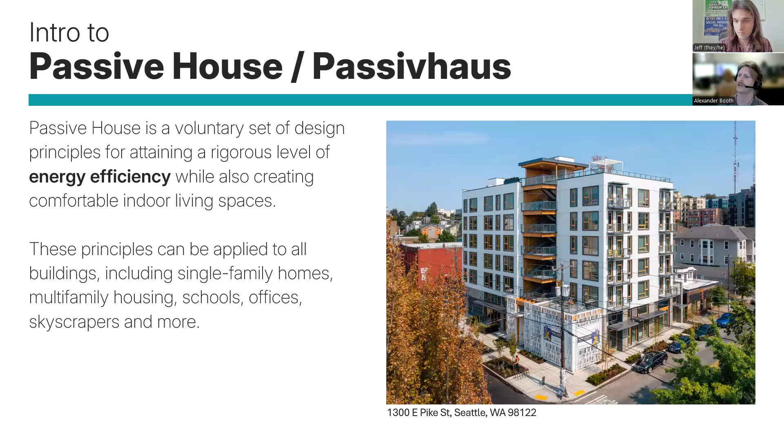The journey to modern passive house standards has roots that stretch back several decades, grounded in pioneering research and practical application, particularly in response to the oil crises of the 1970s. Today we face another US-made energy crisis, which I'll touch on later. A significant and often cited precursor to Passive House is the Saskatchewan Conservation House built in Canada in 1977. The groundbreaking project was an early, ambitious attempt to create an ultra-low energy home, pushing the boundaries of insulation thickness, airtightness, and passive solar design to radically reduce energy use in heating and cooling.

It demonstrated the immense potential for dramatically reducing reliance on active heating systems, such as furnaces, and served as a powerful proof of concept for the high-performance building movement. If a home in a frigid climate could consume ultra-low amounts of energy, then the same could be said of any home anywhere in the world.

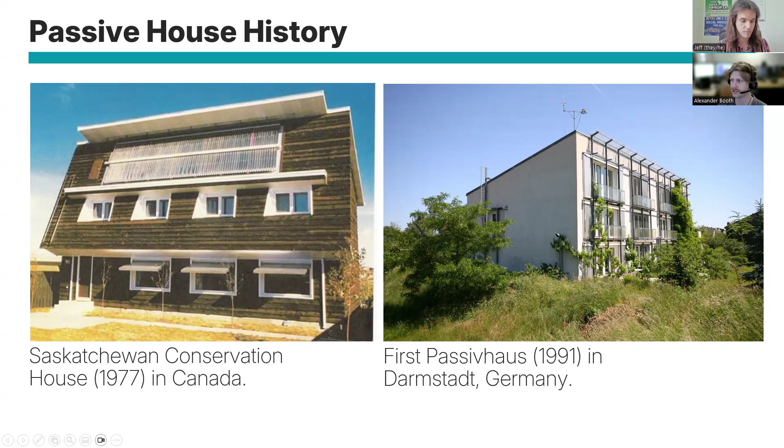The official birth and formalization of the Passive House standard as we know it today occurred in Darmstadt, Germany in 1991. This project, which became the world's first passive house, was a result of a visionary collaboration between Dr. Wolfgang Feist, a physicist, and a Swedish professor, Bo Adamson, of building science. They meticulously established the core technical criteria, focusing on energy, airtightness, and thermal performance that define passive house. It was not a one-off project. It was carefully monitored for decades, proving the efficiency and durability of the standard. Since then, it has been replicated and refined globally, demonstrating these principles are not just theoretical, but highly achievable and practical in real-world construction across diverse climates.

To truly understand Passive House, it's essential to recognize that there's no single magic bullet or isolated technology that achieves the standard. Instead, it's a highly integrated, holistic design strategy built upon excelling in four fundamental control areas that define a building's performance. These pillars don't operate in isolation, they work together to create a superior building envelope and indoor environment.

The building envelope is essentially whatever component faces the exterior, so the roof, outside walls, and the bottom floor that touches the ground, controlling heat flow to prevent unwanted heat loss in winter and unwanted heat gain in the summer. Air control, seen here, addresses tiny air leakages, which are major sources of energy loss. Radiation control focuses on managing solar energy and harnessing daylight, and moisture control is critical for preventing water damage, mitigating mold growth, and ensuring healthy indoor humidity levels.

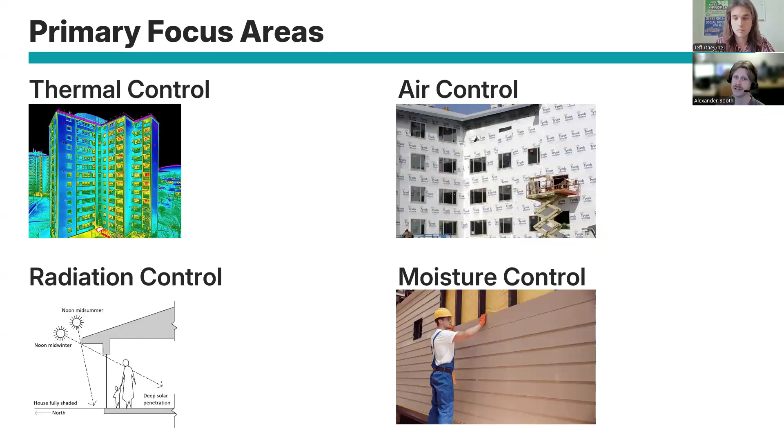Exploring the challenges they face and the innovative detailed solutions Passive House uses to overcome them. The first pillar, thermal control, is fundamentally about maintaining stable conditions regardless of weather extremes, be it a winter, scorching summer, or anything in between. The goal is to minimize energy required to achieve this.

Left illustrates a pervasive and critical flaw in conventional construction, which is the thermal bridging in these 2x6 studs. They act as bridges or direct thermal highways, allowing heat to bypass the insulation and easily escape the building in winter. One way to think about it: a solid object is denser than air, so like the wood, it has more atoms per inch cubed. I like to imagine that each atom carries a bunch of heat with it, and if you have more atoms with more heat, it's able to push that heat through. That's why the studs here, and the concrete columns and concrete slabs on this concrete tower, do the same thing.

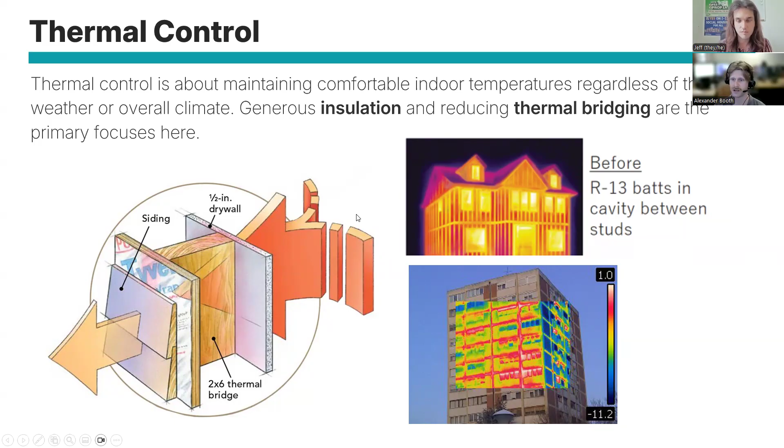So that acts as the bridge. It significantly undermines the overall effectiveness of cavity insulation, creating uncomfortable cold spots on the interior, increasing the risk of condensation, and leading to a lot of energy waste. The thermal image of this home also illustrates that issue. The bright yellow and orange spots indicate areas of substantial heat loss from the interior, usually around the structural elements, as well as the concrete tower, meaning the structural system is not isolated from the exterior. The uncontrolled heat movement is just a massive heat loss, and that's something Passive House aims to eliminate.

So here, their solution is continuous insulation. It dramatically improves thermal performance by implementing this 1-inch rigid exterior foam along the outside. As shown in the diagram, instead of relying on insulation between the structural members, it's applied over the structural members and continuously over the roof. This effectively wraps the entire building in a thermally unbroken blanket, ensuring no part of the structural frame directly connects the interior to the exterior. This critical continuous layer eliminates the thermal bridges that plague conventional construction, creating a much more consistent and effective thermal envelope.

The result of this extra layer of design is evident in this after thermal image. You can observe a far more uniform and darker color across the building's exterior, indicating minimal heat loss and a consistent surface temperature. You can see a clear example of this home in the bottom right with very efficient walls, which are all blue. The windows are about as efficient as the home on the left, but the walls are much better. This signifies that the building's thermal performance is optimized, translating directly into vastly improved indoor comfort and the virtual elimination of cold spots and drafts. This fundamental shift from insulating between the structural elements to insulating over them is a cornerstone of Passive House performance, contributing to a more durable, quiet, and thermally stable indoor temperature.

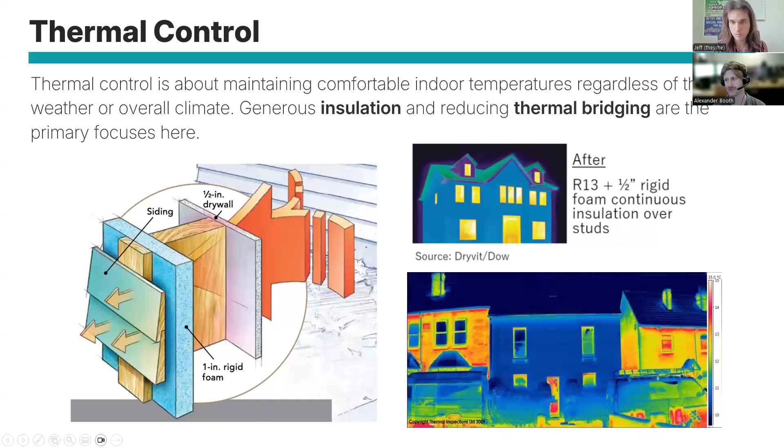To achieve such robust thermal control, Passive House designers have a diverse and sophisticated palette of insulation solutions. Here it highlights all of these common types, such as spray foam, fiberglass, cellulose, mineral wool, reflective, rigid foam board, loose fill, and batt insulation. I've highlighted cellulose, mineral wool, and loose fill as our favorites simply because they have less embodied carbon, if you are familiar with what that is.

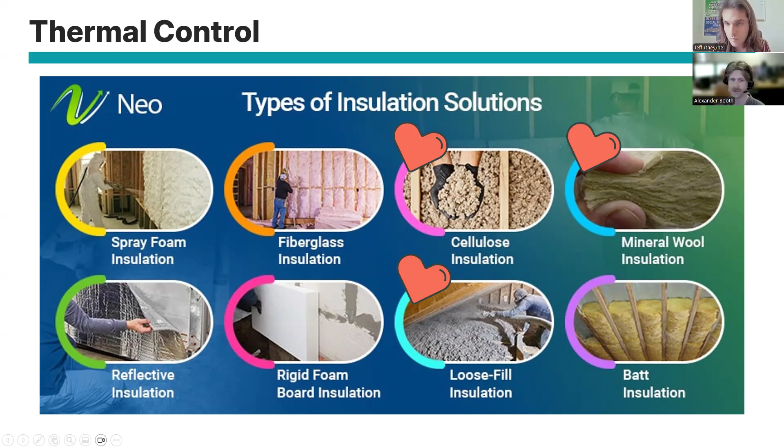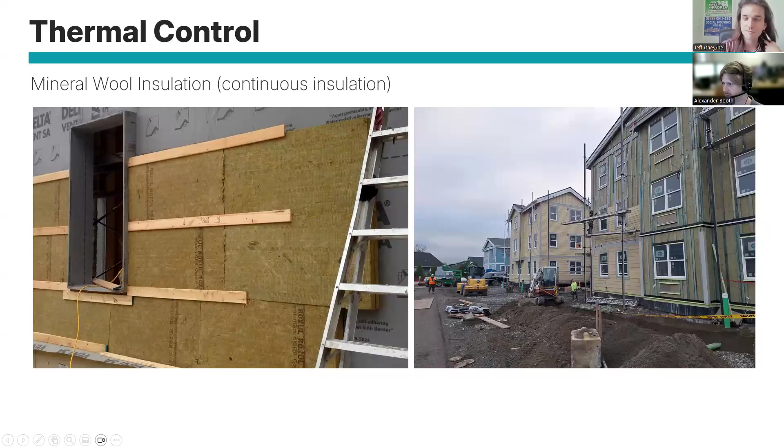One particularly effective and increasingly popular solution for exterior continuous insulation is mineral wool insulation, which is what it sounds like—a bunch of minerals extruded into a wool-like material. As you can see in the insulation image on the left, it's typically applied as dense, semi-rigid boards directly over the building's sheathing. Mineral wool offers excellent thermal performance, is naturally non-combustible, moisture resistant, and provides good acoustic dampening. This continuous application is paramount to eliminating thermal bridges and ensuring the entire building performs as a truly integrated thermal envelope. The image on the right shows one of my projects, also installing 1 inch thick mineral wool, which you see underneath this siding here. And this mineral wool on the left is about 2.5 to maybe 3.5 inches thick, which is pretty thick mineral wool.

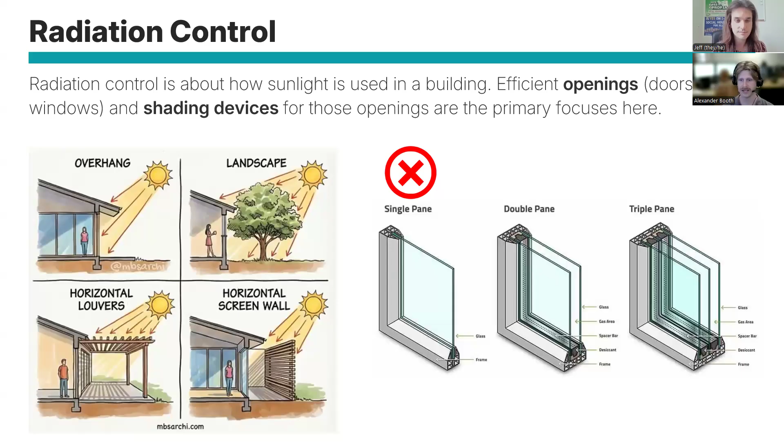Passive house standards mandate exceptionally high performance windows, sometimes requiring triple pane, which feature multiple layers of low emissivity glass, which is like a special film on the glass. It also includes gas fills like argon and krypton that carry even less heat than typical air. These advanced windows dramatically reduce heat loss in winter and unwanted heat gain in summer, while also improving acoustic performance.

Passive House takes a fundamental and intentional approach to building orientation from the very outset of the design process. Hey Alex, really quick, you said it improves acoustic performance, what do you mean? Good question. Acoustics would be the sound. A lot of windows don't really do a good job of blocking sound, but thankfully, the more insulative a window is, the more it also blocks noise.

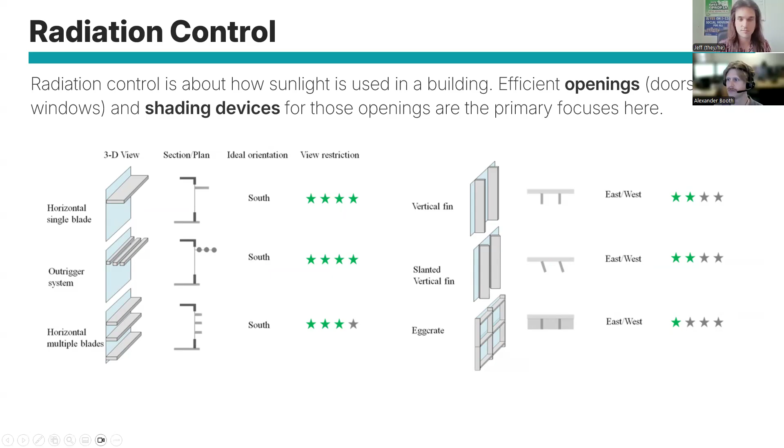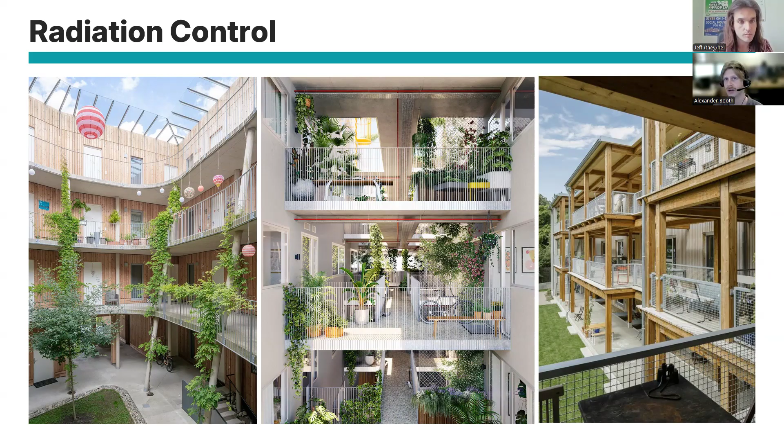Air control, the third critical pillar and arguably one of the most defining characteristics of Passive House, is the control of the air. These technical mandates make buildings exceptionally airtight to prevent uncontrolled air leaks.

It's crucial because uncontrolled air movement through any gap, crack, or penetration is a major culprit in energy waste. It leads to uncomfortable drafts, allows outside pollutants such as dust, pollen, and volatile chemicals like air pollution to enter, and enables moisture to infiltrate and condense within wall cavities, causing potential damage and mold, significantly compromising the effectiveness of the insulation we talked about. By painstakingly sealing the building, Passive House eliminates these problems, ensuring consistent indoor air quality and temperature, and drastically reducing heating and cooling loads.

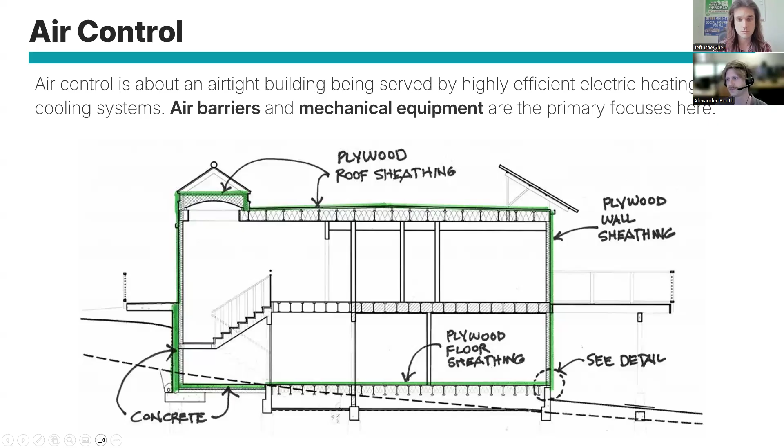This focus on air tightness is quantitatively measured by a blower door test, which puts a giant blower fan on the front door of a unit and blows air in at a certain pressure, measuring what's called the air changes per hour.

To put this into perspective, Washington State allows 4 air changes per hour for residential units. Most other U.S. states are typically in the range of 3 to 5. Florida just downgraded their standard from 3 to 7 air changes per hour. The Passive House standard, though, is a mere 0.6 air changes per hour, which is more than 6 times more airtight than the minimum required in our state.

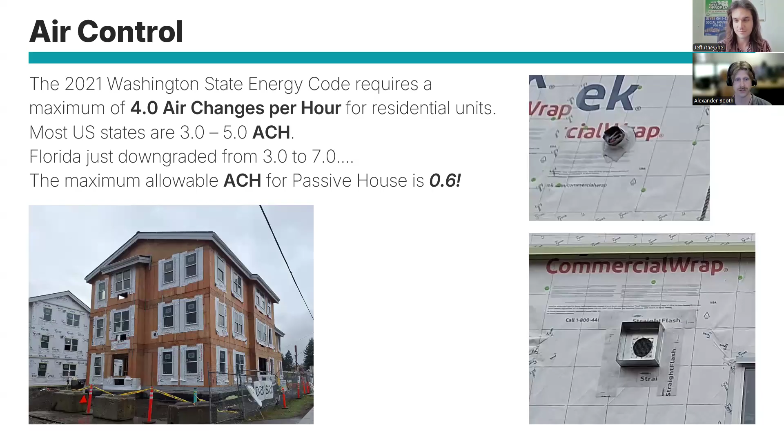This extreme level of air tightness is a cornerstone of energy performance, but it also offers benefits like improved acoustic comfort, meaning less sound from the exterior, reduced dust and pest infiltration, and enhanced structural durability because less water gets in. It also means one must be careful to select a contractor that can adhere to strict quality standards, because not every contractor is ready or prepared to meet the highly technical requirements.

An unusual problem is the slamming door problem. While air tightness is a monumental advantage for energy performance, a very tightly sealed building can create an unusual side effect, creating differences in air pressure between rooms that can lead to doors slamming or becoming difficult to open.

These sophisticated systems continuously bring in a controlled stream of fresh outdoor air, exhaust the indoor air, and crucially, these ERVs, energy recovery ventilators, recover about 80% of the heat from the air before it's put outside the house. So not only do these machines maintain perfectly balanced pressure throughout the home, but they also ensure exceptional indoor air quality.

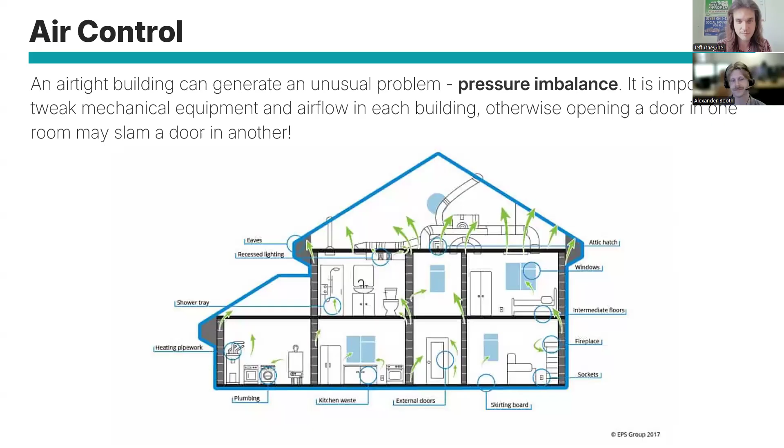So we have one more quiz question. What elements are potential air leak risks in a typical building? Electrical outlets, light fixtures, windows, or all of the above?

We've got a lot of all-of-the-aboves in the chat, Alex. Nice. All right, you guys are all geniuses.

It is all of the above. Pretty much anything that is in a wall is a potential air leak risk. You want the air that is in your current room to not leave that room unless it is particularly designed to do that.

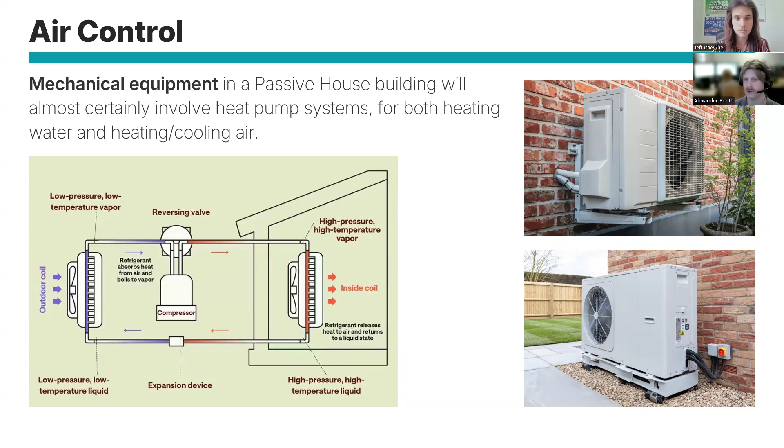This is the diagram showing how it works from the inside to the outside. Unlike traditional furnaces or boilers that generate heat by burning fossil fuels, heat pumps simply move energy from one location to another. In winter, they extract heat from the colder outdoor air, even in freezing temperatures, and transfer it indoors. In summer, they take the heat from indoors and dump it outside. This fundamental principle of moving rather than creating heat is what makes them so energy efficient.

This diagram highlights how heat pumps provide both heating and cooling seamlessly. Here, this reversing valve simply changes whether you want to heat or cool, so you can have the same system do both. Instead of, in a lot of our old construction, having to have an air conditioner and a gas furnace separately as two different systems, here it's just one.

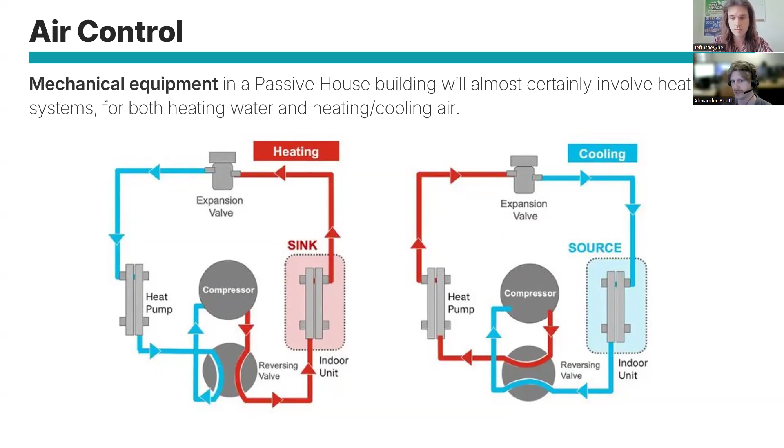All right, and the last quiz question we have: which of these water heating methods aligns best with passive house principles? We didn't talk a lot about water heating, but I'm curious if anyone can give a good guess. We have gas water heater, electric resistance, a heat pump, or an instant tankless water heater.

Cool, this should be pretty easy-ish one. We're across the board. Ooh, across the board.

So the correct answer is actually heat pump water heater. The reason why instant tankless would not normally be the best is because, being instant, it needs either a high amount of electric resistance heating or a gas heater, which is contrary to energy savings and not using fossil fuels in passive house. Electric resistance, while not using any fossil fuels, generates heat, meaning it uses more energy than a heat pump, which just moves heat around.

Mackenzie, you did best. Nice.

Moisture control is our final pillar. It's absolutely critical for the long-term durability, occupant health, and structural integrity of any building. Its purpose is to manage and prevent water from entering or accumulating in unwanted places. Uncontrolled moisture can lead to mold, rot, degradation of materials, and even structural failure.

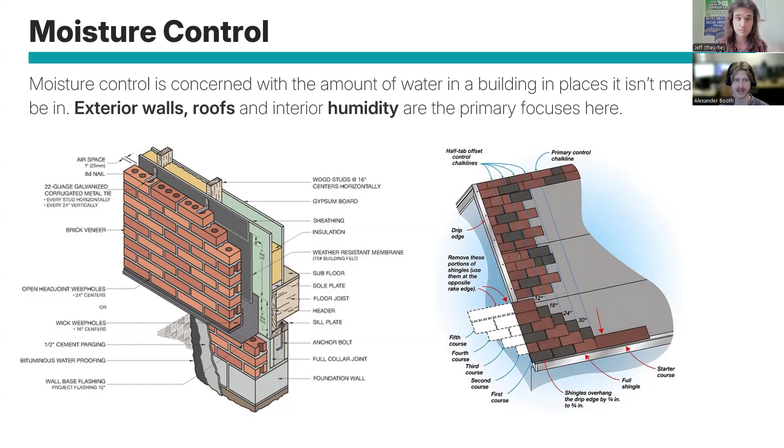Effective balanced ventilation systems play an indispensable role here. They not only bring in fresh filtered air, they also actively help control the moisture content, removing excessive humidity or adding humidity in case it's too dry.

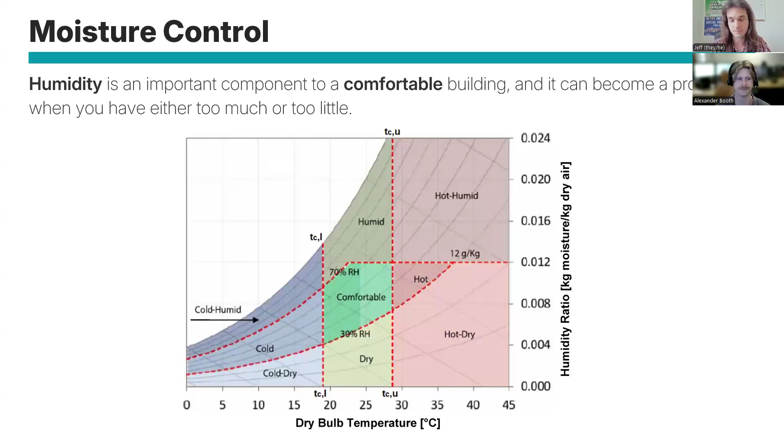Super insulation, thermal bridge free design, energy recovery ventilation with ERVs, which take the heat that's existing in the air, high performance windows, and air tightness. All are some of the most important critical technical parts of Passive House.

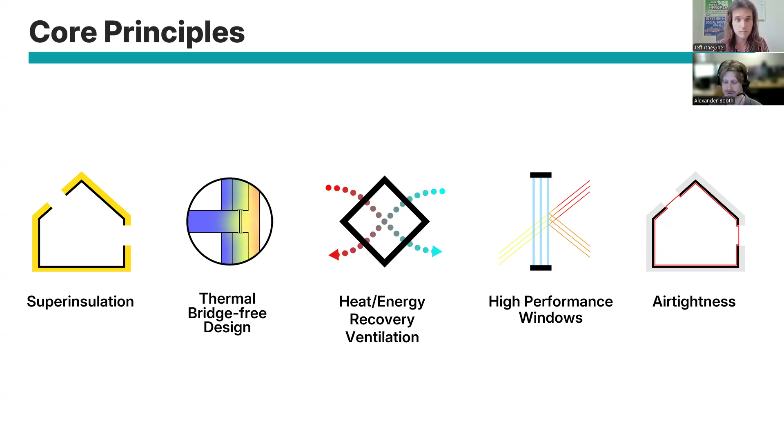Now that we've covered what Passive House is, I want to talk about why it matters. This is so critical because it goes far beyond individual energy bills or personal comfort. It is a powerful, tangible, and scalable solution that addresses interconnected global challenges, impacting our environment, economy, energy security, and societal well-being. Passive House offers not just a better way to build, but a more robust blueprint for creating a sustainable, resilient, and equitable future for all.

This pie chart lays bare the sheer scale of global CO2 emissions, totaling a staggering 36.3 gigatons annually. When we talk about tackling climate change and decarbonization, we must strategically target the largest contributors, and the built environment, shown in black, really stands out.

Building operations alone—the energy used for heating, cooling, lighting, and appliances—are responsible for about 27% of global CO2 emissions. This includes both direct emissions from fossil fuel use in buildings and indirect emissions from electricity generation to power them. When we account for the entire life cycle, including the energy-intensive production of building materials, the total contribution of the built environment reaches 42% of CO2 emissions.

So Passive House directly targets and dramatically reduces the largest portion of these emissions by minimizing operational energy demand. It's an essential strategy for decarbonizing our planet and achieving critical climate goals, addressing both operational carbon and, by design, often leading to reduced embodied carbon through material efficiency.

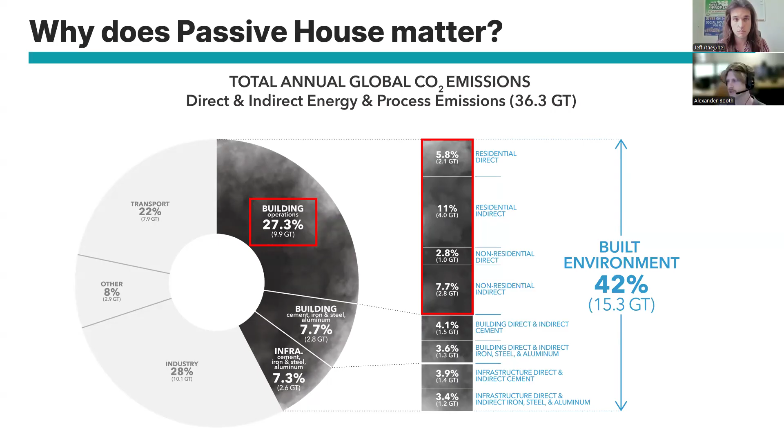The relevance of Passive House extends...

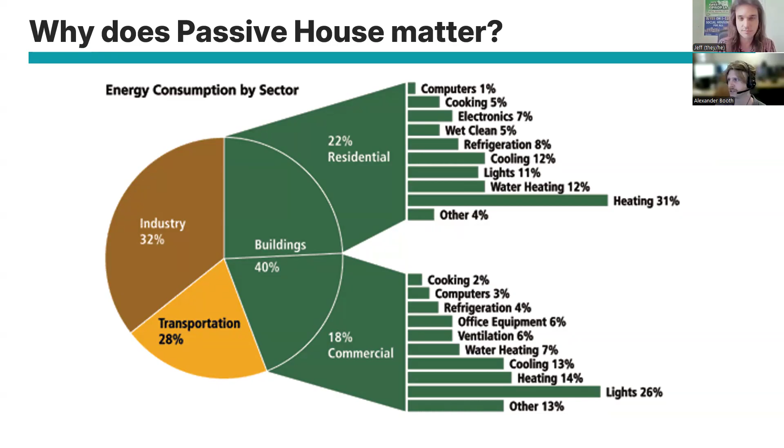So the relevance of Passive House does extend pretty far beyond energy statistics. It is a powerful and practical solution in confronting a series of global challenges, offering tangible on-the-ground responses to several systemic issues. Firstly, it actively mitigates the escalating energy crisis by drastically reducing demand and prompting local renewable energy integration, lessening our reliance on volatile fossil fuel markets. I suspect the recent US-made energy crisis will rapidly accelerate every nation's desire to decarbonize and free themselves from unreliable energy sources, and Passive House is a major part of that endeavor.

Passive House is also a frontline defense against the climate crisis, directly addressing the largest source of greenhouse gas emissions through the built environment. Furthermore, it directly touches upon the food crisis by reducing energy demands that might otherwise compete with agricultural resources or require land for energy production.

And critically, it plays a vital role in alleviating the housing crisis, promoting the development of durable, healthy, and affordable to operate living spaces, ensuring that high quality, sustainable housing is accessible to more people and is not just a luxury. This is especially critical when we consider the disproportionate energy burden on low-income households, who will often spend 6 to 10% of their income on utilities, compared to about 3% for higher income groups. It is very common for market rate developers to install subpar mechanical systems to save money, but that results in higher energy bills for residents. Passive House dramatically reduces these costs, making true affordability a reality and a truly multifaceted response to a multifaceted problem.

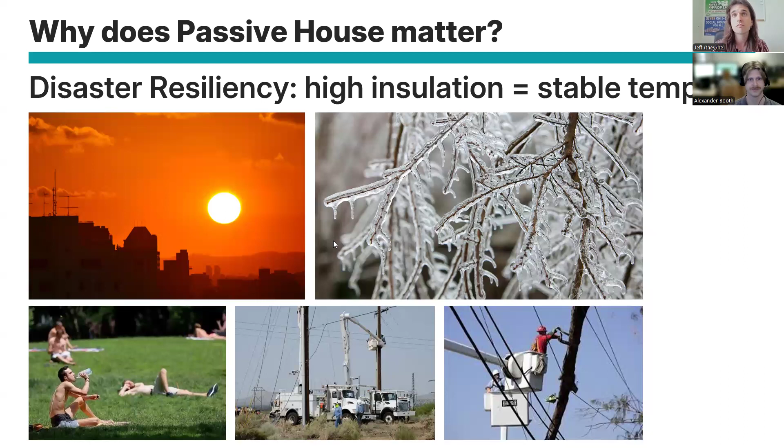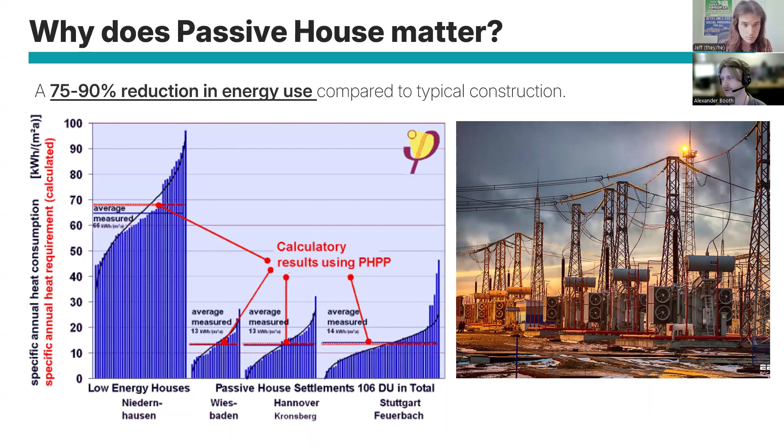Imagine the profound collective impact if every new and existing building adhered to Passive House principles. We would drastically cut national and global energy consumption, significantly reduce our carbon footprint, and create a far more sustainable, resilient, and less energy dependent built environment. Energy can no longer be seen as an infinite resource, but as something to cherish and handle with care.

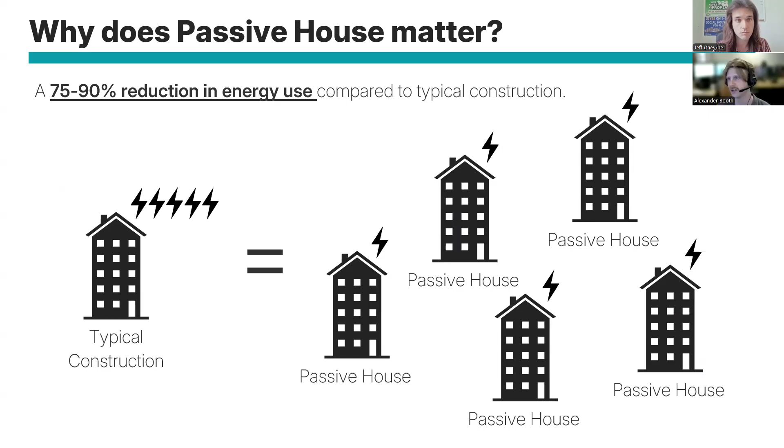So, what are your takeaways from this presentation on Passive House? You can choose more than one.

Interesting. Although it seems like it keeps kicking everyone off every time a new question comes up.

In the chat, we got 'passive house is a crucial standard' and 'essential for climate goals.' You could also label them 1 through 6, with 1 being passive house is essential and 6 being more informed on requirements, and put that in the chat. We got 'it's essential,' 'it's crucial,' 'Seattle needs this standard,' 'more informed,' and 'essential for climate goals.' Nice, okay, that you truly quantify everything. I like that, great.

Now that we understand the profound benefits and the urgent need for Passive House from a global and technical perspective, let's bring it home and focus on our local context. Seattle has a unique opportunity and I believe the necessary drive to truly lead the way with Passive House adoption in a meaningful and impactful manner. After all, Seattle has committed to achieving net zero carbon by 2050 as part of our climate action plan, and buildings are critical to meeting that goal.

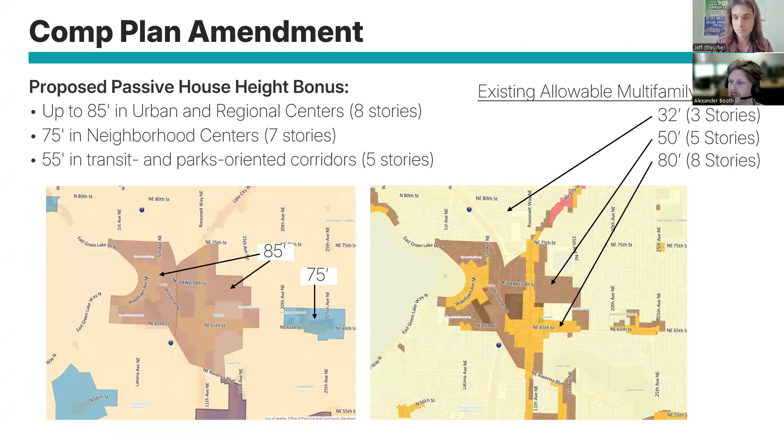Can you head back to that slide really quick, Alex? Yeah, I just wanted to pop in and say these are our draft proposals that we're putting forward, and we're still working with folks to figure out if these are the right numbers. For example, that 55 feet in transit and park-oriented corridors might actually go up another 10 feet. We might round around and figure out, as we talk with more folks working on this, what will really allow social housing and passive house to be incentivized to the point where it's built at scale. Thank you so much for that, that's great—this is just from the current stuff, so that is currently in flux. If anyone has any comments, we'd love to hear them.

Why does height matter? The answer is pretty straightforward: more height directly translates to more units on the same land footprint. The benefits of this increased density are interconnected. By accommodating more people closer to jobs, services, and amenities, it enables shorter commutes, reducing individual vehicle miles traveled, traffic congestion, and related emissions. Increased height fosters reduced car dependency, making public transit, biking, and walking more viable and attractive. Most importantly, by strategically accommodating more people, we protect agricultural land and wildlife habitats from the irreversible effects of sprawling development. Relying on existing utility infrastructure, rather than what's required in sprawl, is a huge concern for cities trying to reduce their liabilities.

And then the elevator shaft is very expensive, and the roof is very expensive, so the cost of building each of those units overall is much higher than if you spread out the same cost to all these other units. While it is more expensive to build, say, 8 stories instead of three, the cost per unit is a lot cheaper.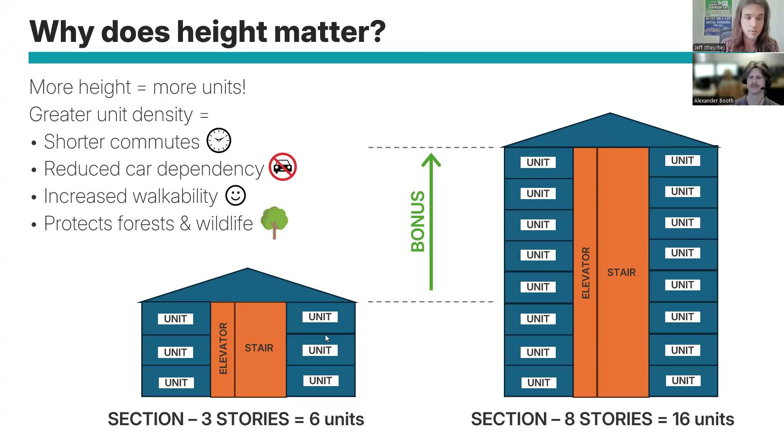This is the direct, conscious choice we make with our zoning and development policies. Either we continue to expand outwards with unsustainable impacts, or we build smarter, more sustainably, and more equitably within our existing urban footprint with these passive house amendments.

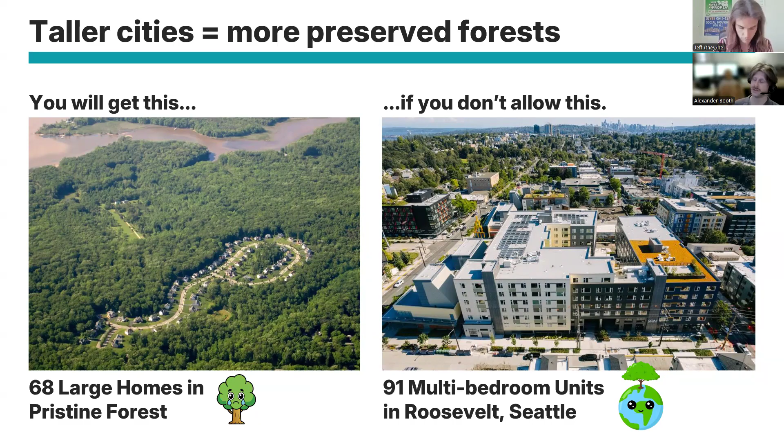Passive House promises homes that offer unparalleled comfort, promote health through superior air quality, and provide critical resilience during increasingly common extreme weather events and power outages. It's the most powerful tool we have to drastically cut energy consumption, directly confronting the climate and energy crises. By embracing Passive House principles, especially through initiatives like the Seattle Social Housing Developer, we can ensure that high-performance, low operating cost housing is accessible to everyone, not just a privileged few.

Seattle has a unique chance, and I believe the collective will, to help lead the nation in this movement, to build a city that is both dense and green, vibrant and resilient, and fair for all its residents. Your engagement during this lunch and learn today is the first step. The next is to translate that understanding into action. Your voice is incredibly powerful in shaping our city's future.

By supporting this proposed comprehensive plan amendment and advocating for these changes, you become an active participant in building this better future. This isn't just my vision, it's our neighbor's vision. It's a future we truly can and must build together. It's all of our visions.